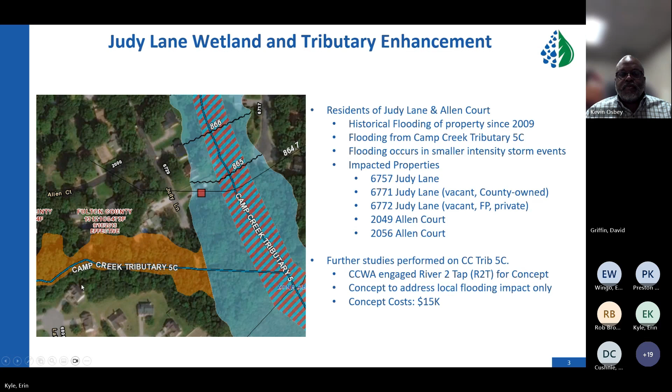So that work was done, and we looked at ways of possibly introducing some sort of wetlands and tributary system over there, to where we can do some grading in that area, improve the amount of drainage or runoff that's going into the residents' yards over there, and trying to direct that drainage from tributary 5C to a wetland feature.

But we really only wanted to address those lower intensity storms, minimize any yard flooding to those neighbors, perform that site grading. There are a couple of vacant properties at the end of Judy Lane there that we might be able to use, those entire properties. We went ahead and determined that, hey, we need to go ahead and move forward in the actual design.

Mind you, these are still private properties, but our friends at the county, they were able to get some CDBG funds to sort of help with that process. And we use some watershed funding to help pay for that. The full scale design, permitting and bid services by R2T was estimated at about $257,000. We estimate construction to be about $1.1 million.

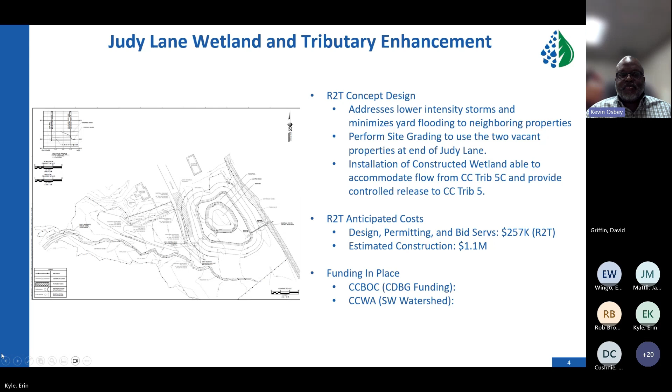So the scope of services that we used for R2T for their actual design services were essentially six tasks. Obviously, you do that boundary survey and tree inventory. You do all of your H&H stormwater analysis. Task 3 was to perform preliminary engineering, then go into detailed design, permitting, and move forward with bidding support activities for the overall scope. Next slide, please.

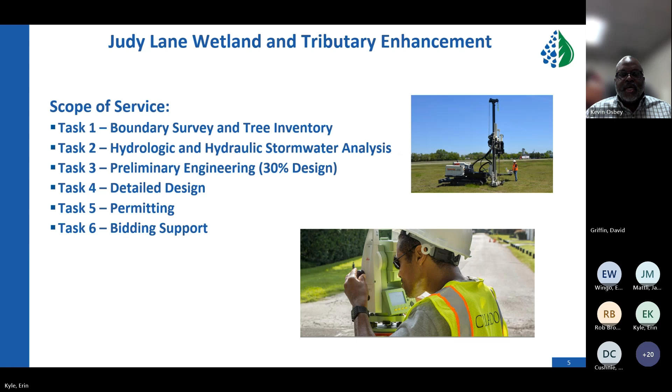So CCWA, we realized that most of this work would have to take place on those two vacant parcels. One, we found out, was actually acquired by the Clayton County Land Bank. That's the property on the west side of the road. And on the east side of the road, there was a private property owner up in New York who purchased that.

Obviously, both of these are in floodplains, so we were able to acquire the one property from the land bank. We worked with them, and then we reached out to the owner for the other property on the east side of the road, and we acquired that property.

We also worked with the Clayton County Emergency Management folks. They were the managers of the actual grant funds for CDBG. So we had to go through a subcontractor agreement so that we can use those funds for this project, and make sure that that was okay with the folks at the CDBG office. Next slide.

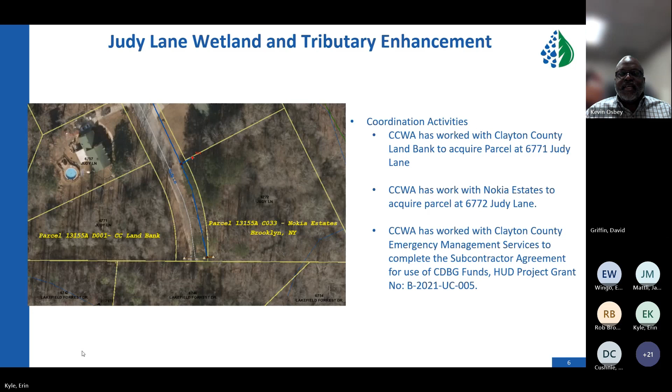So, we went to our board and we recommended moving forward with the task order for R2T to do the actual design work. We also had to authorize our board chair to execute the agreement with Clayton County government, because CCWA and Clayton County are different entities. So we had to create a subcontractor agreement, which is managed by the HUD office at Clayton County. We had to make sure that we had our funding available in our stormwater budget.

We're still working on the actual design. We're actually in the process of preparing for the bid services. We'll select the contractor, and we will hopefully perform that work, get it all done here within the next 6 months or so. So that's our goal. We'll be putting that out to bid here shortly. I think that's the last slide.

Yeah, we'll pause here and do a poll question. So let me launch it real quick, but the poll question is, which item is not part of the engineer's design and bid phase scope of services on this project? Boundary survey and tree inventory, permitting, detailed design, channel dredging.

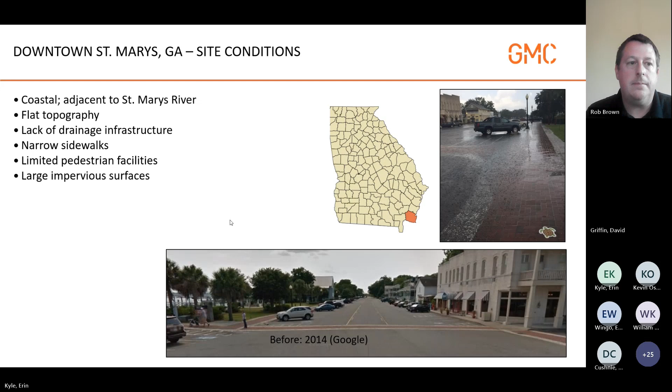So there's been a lot of planning efforts in St. Mary's that led to some additional grant funding that was received for this project. Through all the planning efforts, it helped identify that this was a priority area that needed stormwater improvement, so that provided some extra benefit during grant applications as we're looking to receive grant funding for some of the stormwater upgrades.

A key plan was the St. Mary's 9-element watershed management plan that was completed in 2014. Because this area of St. Mary's drains to the St. Mary's River where there's dissolved oxygen impairment, and because there's this 9-element watershed management plan, it enabled the city and the project to be eligible for Section 319H grant funding from Georgia EPD. So that was a benefit for having some of the planning taking place in the city.

Some of the later plans just identified more that there was recommended stormwater improvements, and then once the streetscape project was conducted, that it was recommended to include green infrastructure practices. Next.

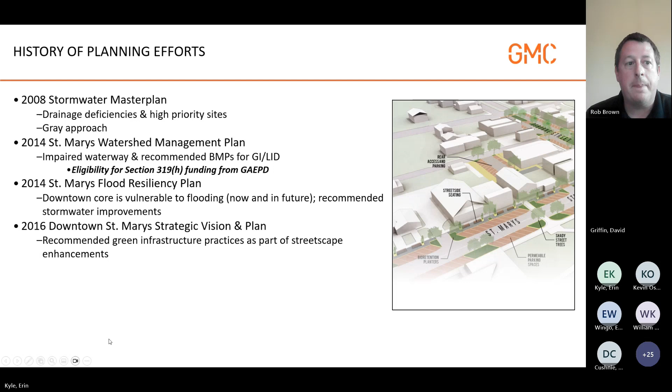So the overall goals of this project were enhancing those roadway and pedestrian access, as well as addressing the stormwater flooding that basically occurs after every intense rainfall event. By pursuing grant funding, the city was able to expand the footprint and not just do a couple of blocks on St. Mary's Street on the southern end of that picture, but they're also able to run several blocks up Osborne Street, and then the green dot at the top of the picture is up at City Hall, so they're able to do additional green stormwater infrastructure implementation at that location as well.

So they coupled GDOT grant funds that was state funded with Georgia EPD Section 319H grant funds, which is federal funds, to utilize some match from the state funds for the federal grant, so that they were able to generate more match without as much use of local funds. So it was a good combination of grants that were used at this site. Next.

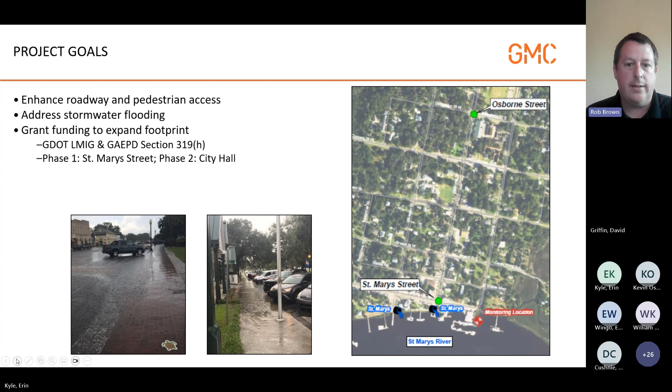So overall, from the Section 319H grant, the city received $500,000 in grant funds because it was conducted in 2 phases, the St. Mary's Street on the riverfront, and then phase 2 being up by City Hall, improvements along Osborne Street. So the grant funds basically paid for the majority of the green infrastructure elements that were incorporated into this project. In total, there was 19,300 square feet of permeable pavement, and this is basically solid paver blocks, but there's small stone in between the blocks to allow for infiltration into the surface, and then a washed stone aggregate base layer below that to create storage for the stormwater runoff.

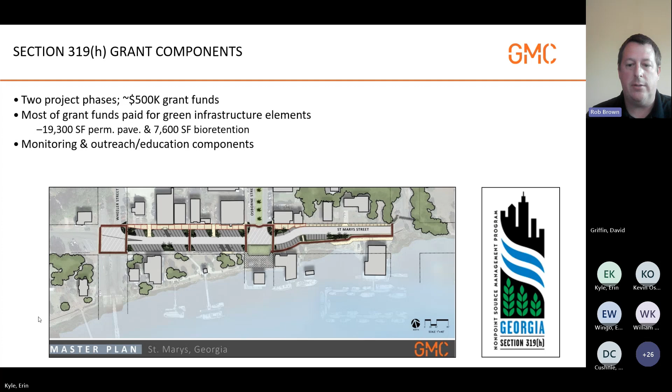And then there was 7,600 square feet of bioretention cells installed in each of the landscape islands, which bioretention cells, if you're unfamiliar with them, they're just basically shallow depressions with a sandy engineered fill media to help promote fast infiltration rates and water quality treatment. The grant also incorporated monitoring and outreach education components that were part of the project. Next.

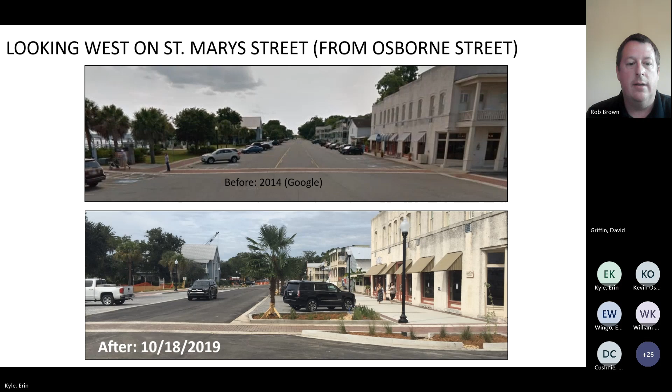So here's a before and after look of St. Marys Street before and after the streetscape improvements. You can see the much wider pedestrian usage, and then in that bottom picture, the bioretention cell landscape island present there.

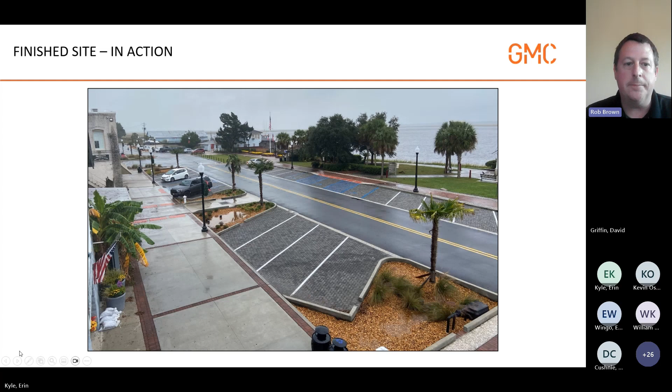Next slide. So I'd mentioned that the project incorporated some monitoring components as well. So I'm just going to highlight all the components, but really focus on the hydrologic elements of the monitoring. Next. So we installed 14 shallow wells across probably about 10 of the bioretention cells and permeable pavement systems so that we could monitor the performance of each of the individual systems.

So within a well, we included a Solinst Levelogger and had two different configurations. One was to measure the surface ponding and surface infiltration rates into the bioretention cells. But then we also had ones installed in slotted well screen that went down into the gravel layer or into the engineered bioretention media to measure the rise and fall of the water within the subsurface zones to look at overall storage and infiltration and exfiltration rates.

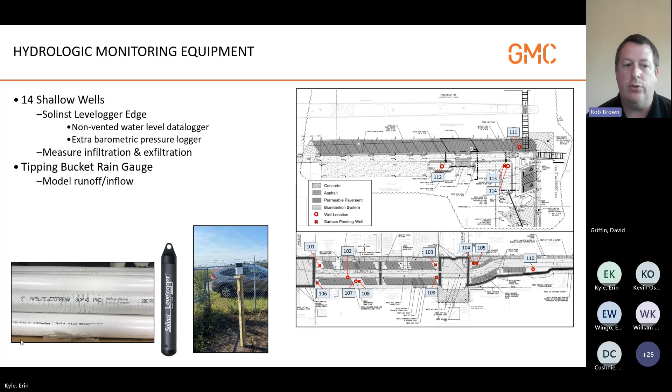We also had a tipping bucket rain gauge on site so that we could be measuring rainfall intensities and depths during each storm event so that we could model the runoff and inflow into each of the systems to use in our evaluation of the individual practices. Next.

So here are a couple examples of those wells deployed in the phase 2 site up near City Hall. So on the left-hand side in our permeable pavement, we had a slotted well screen that went into the gravel storage layer below the permeable pavement to measure that exfiltration rate into the underlying soil and allow us to see when the subsurface storage was at capacity.

On the right-hand side with the bioretention cells, we had 2 wells installed in each of the bioretention cells. The one was slotted in the surface zone, so we can measure the rise and fall of surface ponding, measure infiltration rates, and then the other was slotted in the underlying subsurface in the media layer, so we can measure the rise and fall of the water within the subsurface zone to measure exfiltration rate. And then both of those were used to evaluate when surface and subsurface layers were at their capacity and limits. Next.

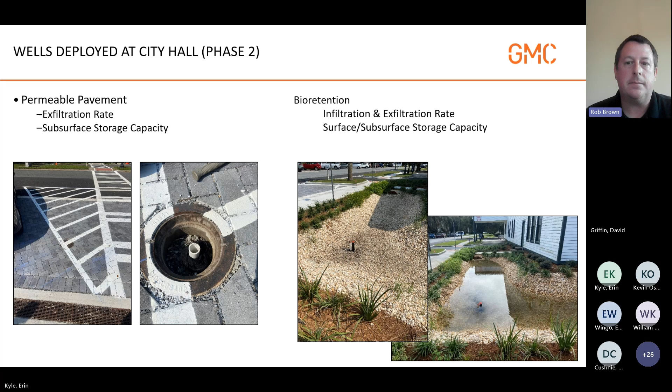So of these 71 events, only one completely filled the gravel storage layer and caused the subsurface capacity to be at its limits. And that was for an event that was just over an inch, but it was due to a very rapid intensity. We had an event later in the monitoring period that was 3.6 inches from Tropical Storm Elsa, and that one was fully infiltrated just because it was over a longer duration.

In general, this site exfiltrated the whole subsurface storage zone within 12 hours or less, and we had similar conditions of the accumulation of water in the subsurface zone throughout this whole monitoring period, indicating that it was still infiltrating just as well at the end of the first year as it was in the beginning. So it did not have any effects from surface clogging limiting its infiltration capacity into the surface.

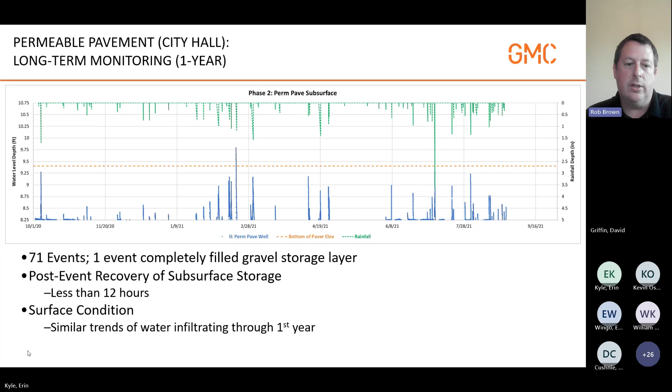This cell, I would like to point out, was quite a bit undersized, maybe about 1/3 to 1/2 of capacity because of limited space availability due to this retrofit design. But overall, from the 71 events, we only had 18 with overflow. Our smallest event with overflow was just under 1/2 inch, and that was due to a very rapid rainfall intensity. The largest to fully infiltrate without having any overflow was 1.4 inches.

So if we have enough duration or lower rainfall intensity, much larger events are able to fully infiltrate into the system. Our infiltration rates range from 1 to 3 inches per hour. The lower rates generally corresponded to more frequent periods of wet weather or cooler temperatures. Next slide.

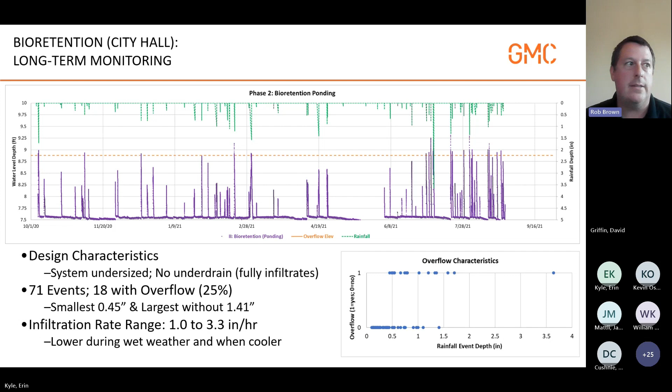So there's periods where water backs up into that stormwater pipe and then somewhat into the underdrain system. So after the first month, based off the monitoring data we were seeing, we installed an inline tide control into the underdrain to help relieve and limit the amount of water backing up into our underdrain system and limiting our storage capacity in the system. We found it was quite helpful; for most of the storm events, it was an effective tool for managing the tide. Next slide.

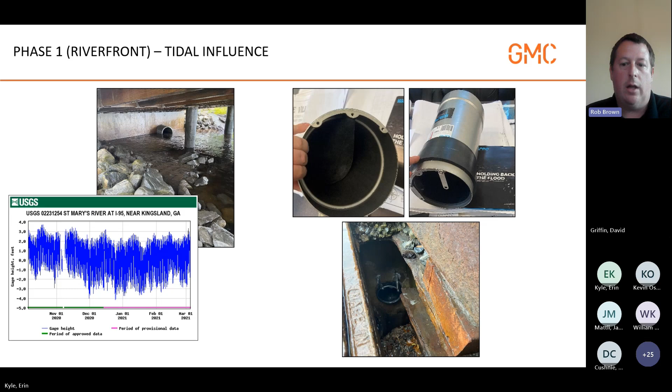And then we did have water quality monitoring, but there was limited data to draw major conclusions just because of the faster infiltration rates. We had set up to monitor the flow from the combined underdrain of permeable pavement and bioretention, but it was very tough to get samples from that because it would infiltrate within a couple of hours. That large storm event with 3.64 inches infiltrated within 12 hours. So it was challenging to get enough samples to draw major conclusions.

And then also we had a few storm events where we had a pretty good first flush come off from the pavement and saw great concentration reductions, but the majority of the storm samples from runoff are relatively clean in terms of TSS and nutrients. So it's hard to clean clean water. So we weren't able to get too many good data points for that.

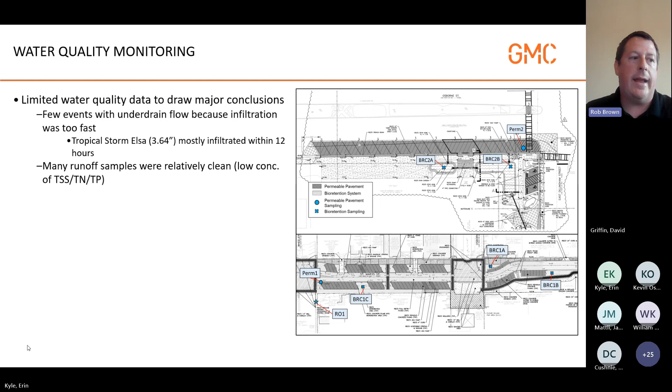But next, I just wanted to highlight a few conclusions from this study. So overall, the implementation of green infrastructure on the riverfront on St. Mary Street resulted in fewer instances of street flooding because we're able to have a lot of storage in those subsurface layers beneath the permeable pavement and bioretention cells.

I know not everybody works on a coast where you're working in tidally influenced systems, but tidally influenced systems and high water tables have a lot of similarities, and you may come across high water tables more often. But either of those two result in some reduced functionality, because as the water table encroaches into the bottom of the infiltrating surface of a green infrastructure practice, it reduces the infiltration rate. And if it encroaches into that layer, then you reduce your storage capacity.

We found some positive results using tide control for the tidally influenced systems. You see on this graphic, to the left of the red dashed line, this was before we had the tide control installed, but afterwards, a much more drastic reduction in the water level that we were measuring in our underdrain system.

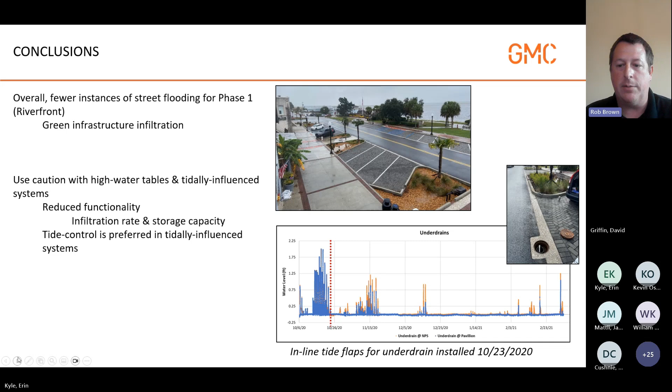There was still some water getting its way into it, but it was much less than it was in the first month before that was installed. Next slide. And then from phase 2, the site up near City Hall, before and after for our summer rainfall events, you can see the effect that was seen by the public coming into City Hall as far as not having to walk through that ponded water in the roadway and parking lot.

But overall, this site had much sandier soils and deeper water table depths, so it was much more effective than the site down near the riverfront. So it's important, if you're working on projects either looking for retrofits for green infrastructure practices or doing a new development, to try and utilize soil testing so that you can do some site fingerprinting to find where you can maximize your infiltration. So if you found a lot of sites like near City Hall where there's deeper water table and sandy soils, focus your infiltrating practices there to get more bang for your buck.

And then lastly, one last thing on that slide: with high water table considerations, down in the coast, you come across high water tables more frequently. So permeable pavement is generally installed more frequently than bioretention cells, kind of different from the rest of the US, just because permeable pavement can be installed with a shallower profile; it really only needs about 1.5 or 2 feet. But a bioretention cell, having the surface ponding, the media, and the underdrain layer, you're looking at 3 or 4 or 5 feet or more of depth that's required.

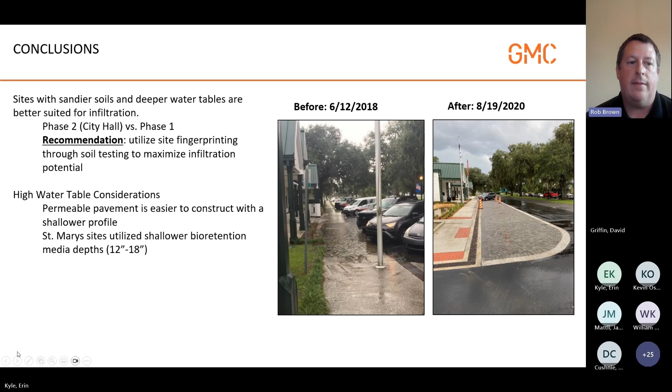And then the last slide is just highlighting that these systems are very dynamic and that infiltration that occurs during an event, so intra-event infiltration, is very important for green infrastructure functionality. This is an example of the permeable pavement system up by City Hall, where they had 1.7 inches over an 8-hour period. But because there were 2 to 3 hours between each of the bursts of rainfall, it allowed that system to infiltrate and create more storage capacity so that the storm event was fully infiltrated, whereas if all the rainfall came at once, it probably would have only stored 1 to 1.2 inches of rainfall.

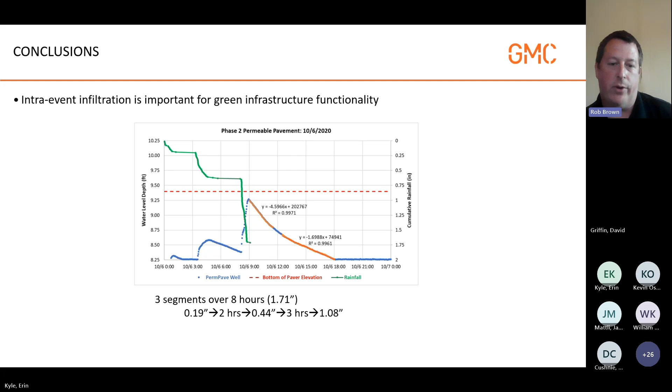And we'll just take a quick pause here for another polling question. Let me launch that real quick. The question is, which factors impact the function of green infrastructure practices? Water table depth, soil type of underlying/surrounding soils, tidal influence at stormwater outlet/outfall, or all of the above. Please answer the question using the pop-up, and if you don't see that, please check the chat; you may have to scroll up a little bit to find it. I'll give a few moments to answer this and then we can review.

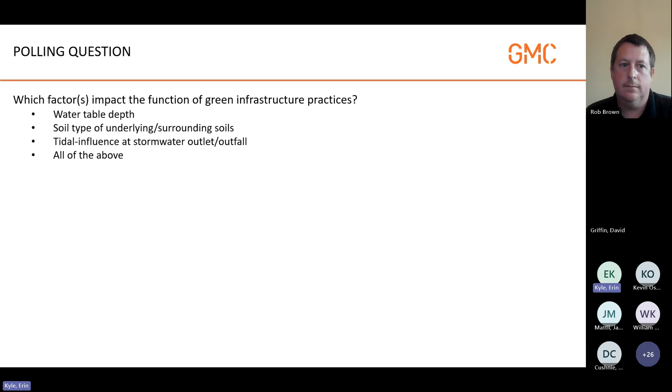All right, I'm going to go ahead and close the poll now. And the majority, if not all, said all of the above. So great job.

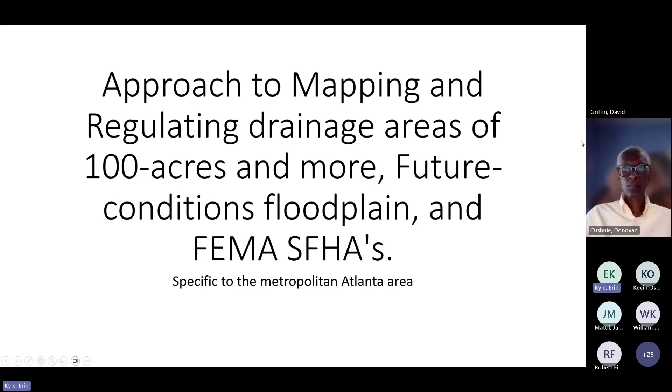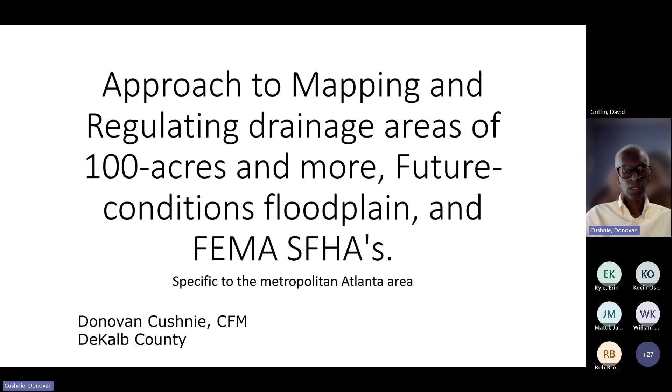I will be discussing approaches to mapping and regulating drainage areas of 100 acres and more, future conditions floodplain, and FEMA SFHAs, specific to the Metro Atlanta region. The foundation of this is the ordinance that was adopted back in 2008 that defined the floodplain boundary in DeKalb County down to the 100 acres or greater basin. So we had to study the areas draining 100 acres or more per the ordinance and provide those studies for the engineering community.

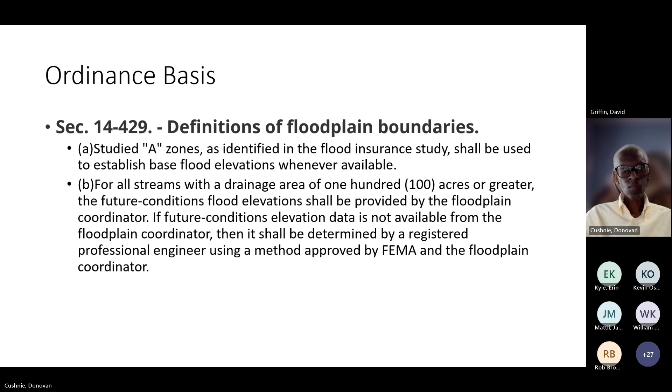In addition to the FEMA SFHAs, DeKalb County applies the future conditions floodplain as well as the effective water surface elevations for areas draining 100 acres or more. In addition, in 2019, we were required to update our ordinance to regulate the flood-prone boundary area. In DeKalb County, it is identified as the area adjacent to the future conditions floodplain.

This area adjacent to the future conditions floodplain is the higher of 3 feet above the base flood or 1 foot above the future conditions flood elevation, whichever is higher, unless the area is hydraulically independent. And so this is what we have an obligation to enforce.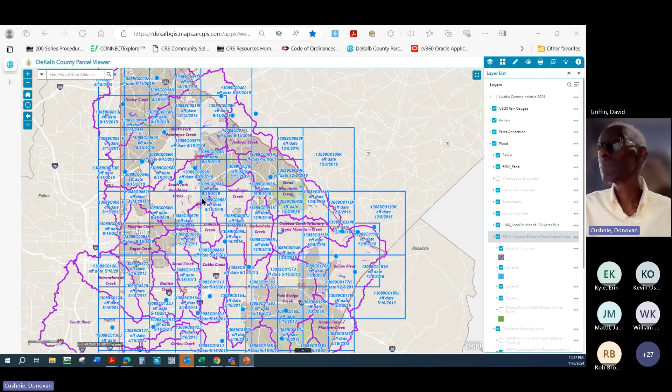So over on the right, there are layers that would communicate the different floodplain features. So you can enter an address, search for a particular property, and through this, you have a number of assets available for you to identify flood risk exposure.

You'll notice there are these red anonymized areas. These are repetitive loss areas. These are areas where DeKalb County has historically found that there have been paid claims against the National Flood Insurance Program. The specific location of a claim is anonymized, but this indicates that if someone is in one of these areas, there is a risk based on historical data of repeated flood losses.

There's a slight lag here. You can expand using the directional caret over here on the right to see symbology information.

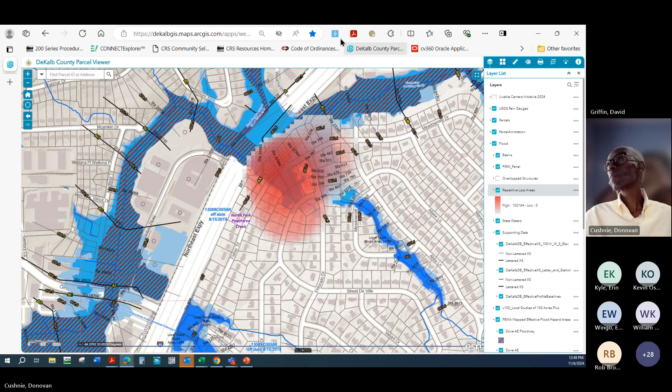Thank you. And let me take the share screen back. So I just have one last poll question. Again, please check the chat if it's not a pop-up on your screen, but the poll question is true or false. The name of the mapped flood-prone area in DeKalb County is AFCF, or area adjacent to future conditions floodplain. And I'll just give a few moments for people to respond. In the meantime, if you already answered the question, feel free to drop any additional questions you have in the chat and we can address those momentarily.

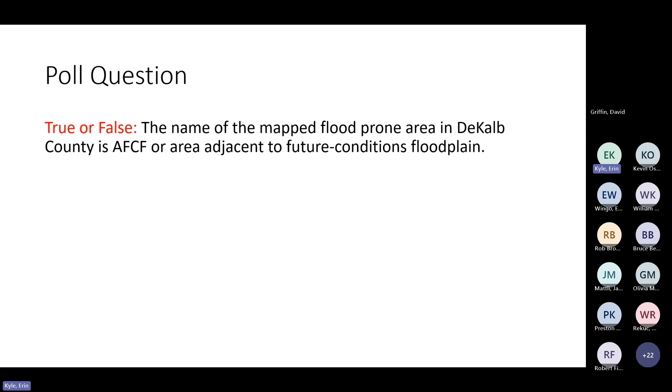Looks like most people have responded, so I'm going to go ahead and close it up. And majority of people said true, and that's correct. Fantastic.

Well, I do have a question to each of our speakers. Just very quickly, what were some of the challenges you faced with outreach in your projects, whether that be internal customers or the external customers and general public? Kevin, Rob, Donovan, anyone want to start with that one?

Yeah, I'll go first. The couple of challenges we had were that with the green infrastructure stormwater management practices, the members from the city, as well as some of the council members, weren't as familiar with those. So trying to get an explanation to them as far as what the function of them are and what they would look like was a bit of a challenge, so that they could understand what we're installing, because it's a little different from the norm. So just getting that communication upfront about the benefits that it would be providing, and that it's a newer system or newer types of practices, but that it's more effective and efficient.

Thanks. Kevin? Yeah, for us, obviously our challenge was because the problem was really private property. We're not necessarily responsible for doing maintenance activities on private properties, but as we went out there, especially after that storm came through in 2020, when the commissioner came out, they were able to really help get the ball rolling because of the funding of it all. They were able to help us with the CDBG funds to at least get something moving forward so that we can assist those folks on their private property areas there.